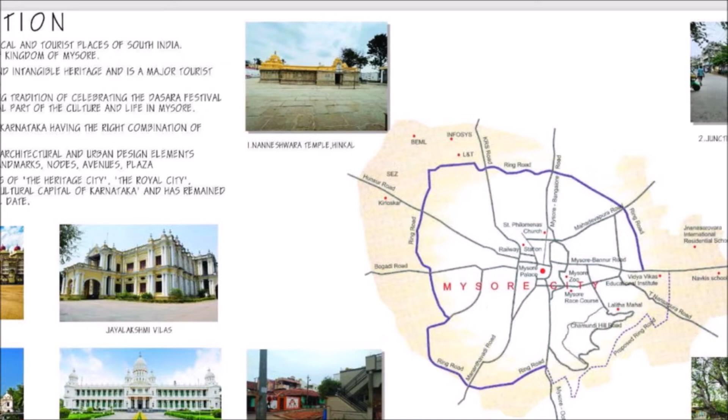Mysuru is one of the famous historical cities of South India, with it serving as the former capital of the princely state of Mysuru, having its extents from Maharashtra in the north to Madras Presidency in the south. It has both tangible and intangible heritage with stunning palaces and richly preserved architecture that is visually splendid to experience, making it a major tourist destination. The city of Mysuru has a long tradition with its practices lying in 400 years of culture passed from generations of Maharajas, celebrating the world-renowned Dasara festival with great grandeur, an integral part of the culture and life in Mysuru. It is a prime heritage city in India, having the right combination of built and natural heritage.

The city is characterized by architectural and urban design elements like vistas, focal points, landmarks, nodes, avenues, and plazas. Mysuru has earned the titles of the Heritage City, the Royal City, the City of Palaces, the Cultural Capital of Karnataka, and has remained worthy of all the titles till date. Among the 4 chosen villages, Paduvarahalli covers an area of 40.5 hectares and has a population of 14,000 people. It has primary community settlements of Nayakas and Gaudas.

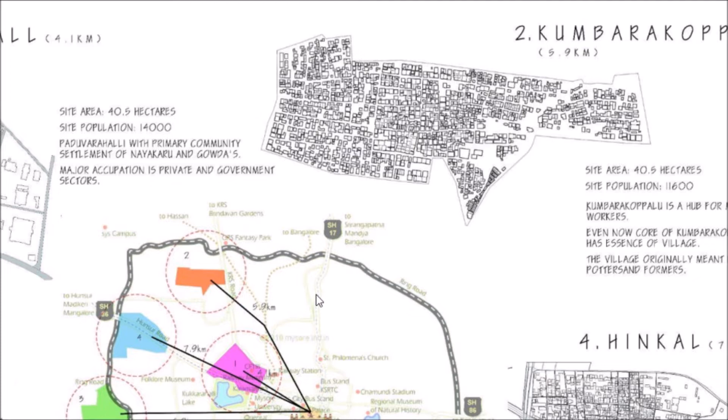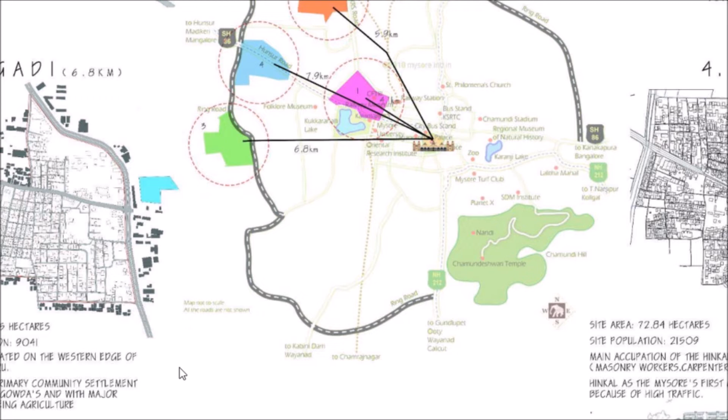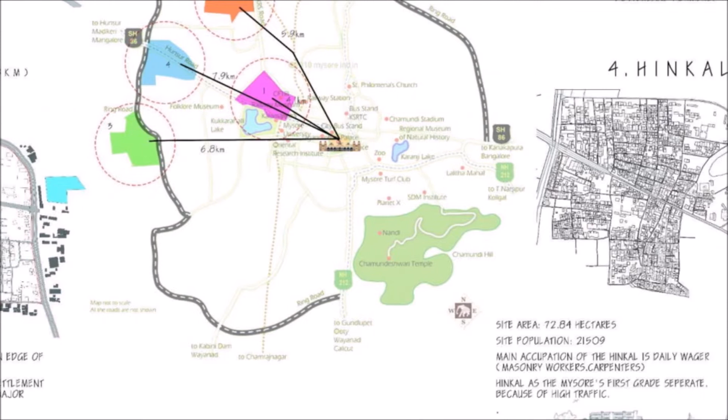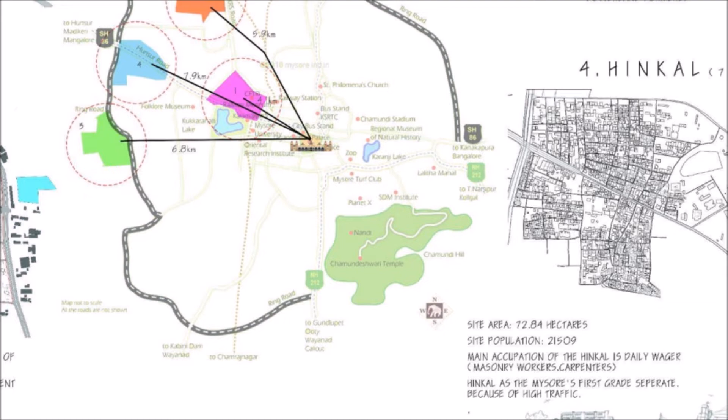Kumbarkoppal also covers an area of 40.5 hectares and houses 11,600 people. The village, which was originally meant for potters and farmers, has now turned into a hub for migrant workers. Bogadi covers an area of 44.5 hectares and holds a population count of 9,041 people. Bogadi was a primary community settlement of Vokkaliga Gaudas and their major occupation was farming. It has now become one of the fastest developing urban villages of Mysuru thanks to the ring road. Hinkal, being the largest chosen urban village, covers an area of 72.84 hectares and boasts a population of 21,509 people. The major occupations of the people living here are carpentry and masonry works.

Keeping history in mind, it was now the task of understanding these villages by conducting study area visits consisting of interviews done by inquiring stakeholders and plot owners, collecting statistics and demographics from government officials, census, and photographs taken on street level, by drones, and of activities on the streets and vernacular houses.

After this intense study, mapping of the areas took place by collection of data, information, and observation on study area. These study area visits in turn helped with the analysis done in the form of SWOT analysis, identifying issues and opportunities the study area had posed and arriving at conclusions of the study areas.

The study was further aided to understand the history and heritage by documentation of vernacular houses along with the street profiles and sections. The study area visits and studies have helped us achieve the aim of the design studio, which is to come up with a proposal with various iterations for these urbanized villages.

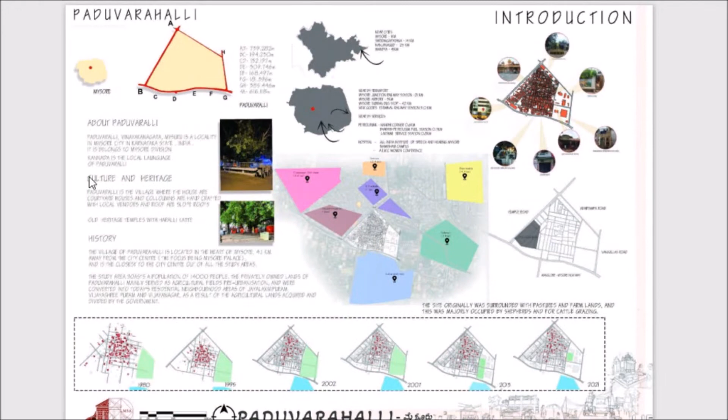Paduvarahalli. The village of Paduvarahalli is located in the heart of Mysuru, 4.1 km away from the city centre, the focus being Mysuru Palace, and is the closest to the city centre out of all the study areas. The study area boasts a population of 14,000 people.

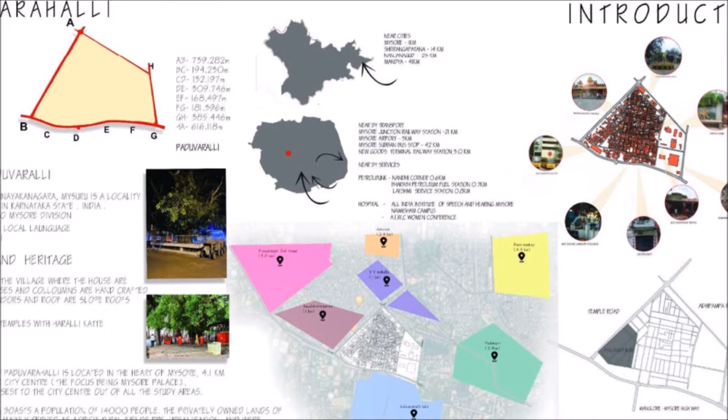The privately owned lands of Paduvarahalli mainly served as agricultural fields pre-urbanization and were converted into today's residential neighborhood areas of Jayalakshmipuram, Vijayashripuram and Vijayanagar as a result of the agricultural lands acquired and divided by the government. Prior to urbanization, the people of Paduvarahalli were farmers and shepherds with their lands located in the surrounding areas of the site, accessible by foot and bullock carts.

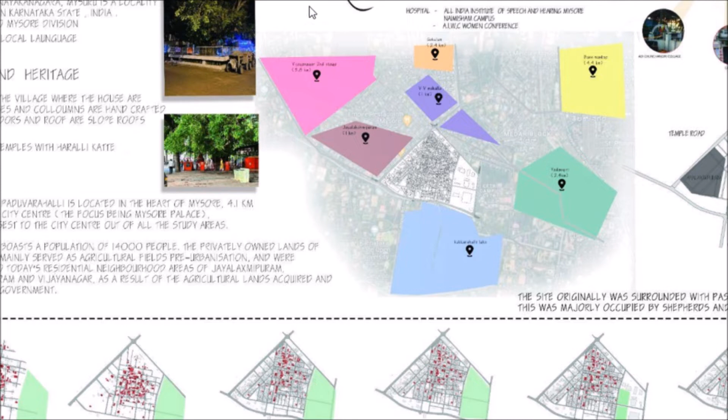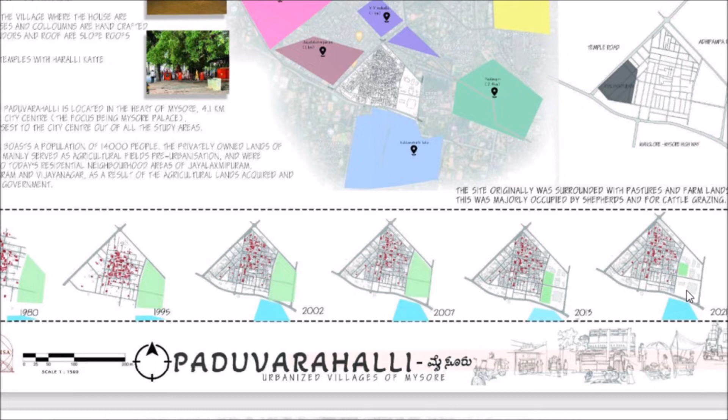Between 1930 to 1990, the CITB, the City Improvement Trust Board, now the MUDA, Mysuru Urban Development Authority, acquired the agricultural lands and divided them into housing plots. During the 1980s, the onset of the municipal corporation meant newer infrastructure and paved roads, as the study area was the closest to the city centre and on a path towards an urbanized setting. But the core village of Paduvarahalli, with its citizens, chose not to undergo this cycle of new change, thus retaining the rural aspect which stays evident to this day.

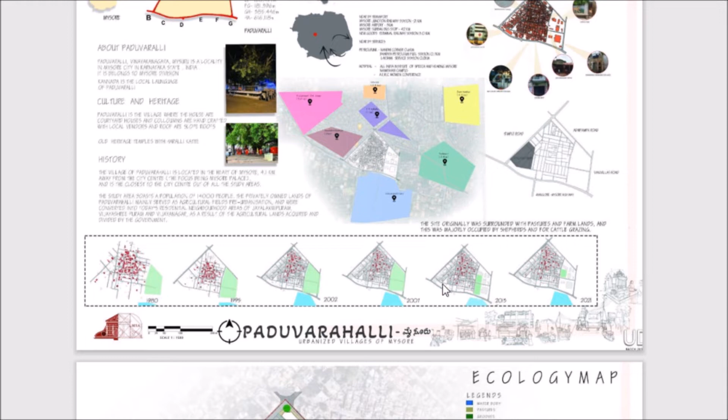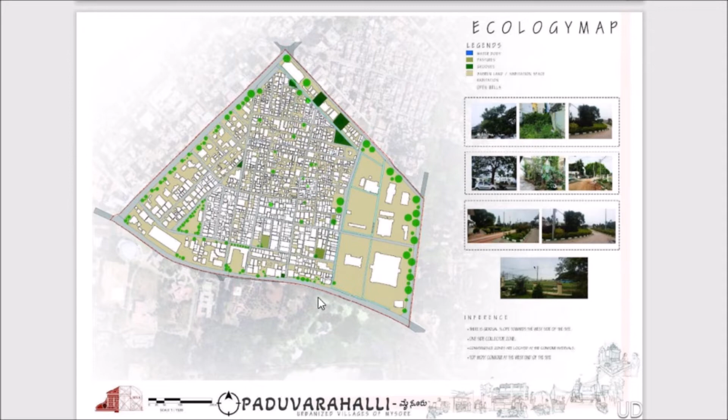The site originally was surrounded with pastures and farmlands, and this was majorly occupied by shepherds for cattle grazing. The area gradually slopes downward from west to east, where the collector basin is located. This basin acts as the major feed to the Kukkarahalli Lake, which is in the immediate vicinity of the study area. Also, this watershed basin is used as the main stormwater let-off, thus keeping the site from flooding. Some of the existing barren lands are either used for cow grazing or as dumping yards.

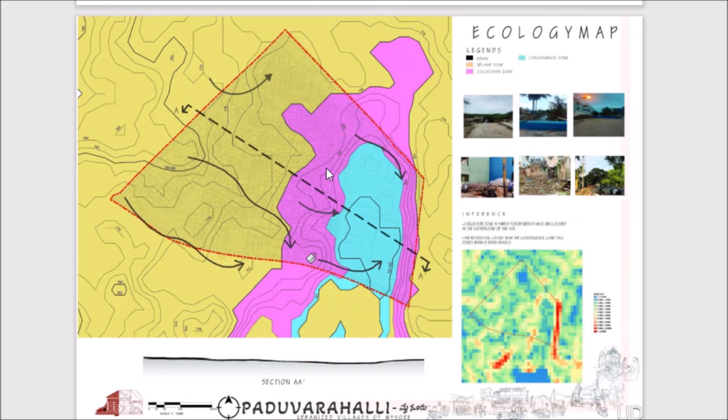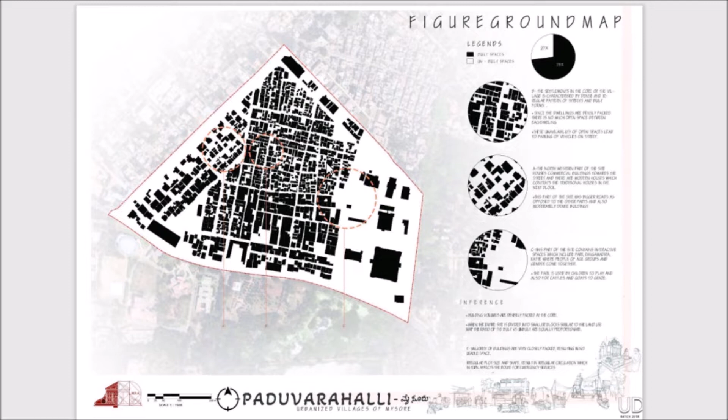The expansion of Paduvarahalli started with the now existing village area and organically spread towards other parts of the modern-day area. Thus, the ownership plots are not organized into that of an urban division, and this is evident in the rural area. Also, due to such dense fabric, the area is permeable and offers easy access to the outlying areas for pedestrian use, but this hinders vehicular and emergency service movement. The dense grain of built spaces gives the study area a distinct fabric from the adjacent neighborhood areas.

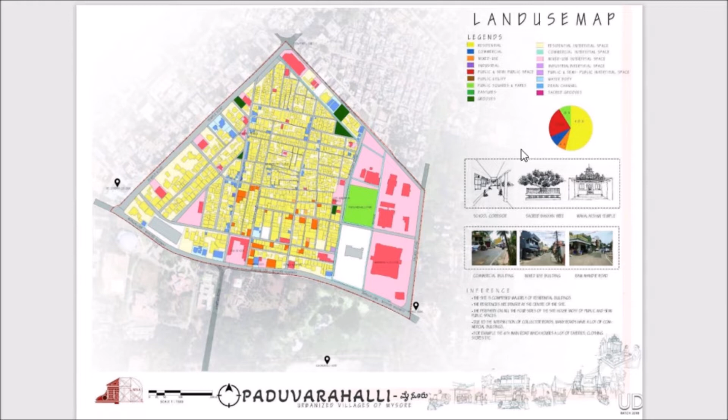Most of the buildings are residential in nature, with other typologies such as commercial and public located near the major roads such as the Mangalore-Mysuru highway, which also is the spine of the study area and the access point to Paduvarahalli. The buildings on site are majorly one-storied, thus have a linear hierarchy in the skyline. Irregular breaks occur due to few multi-storied buildings. This hampers visibility of the user as it is sometimes too monotonous.

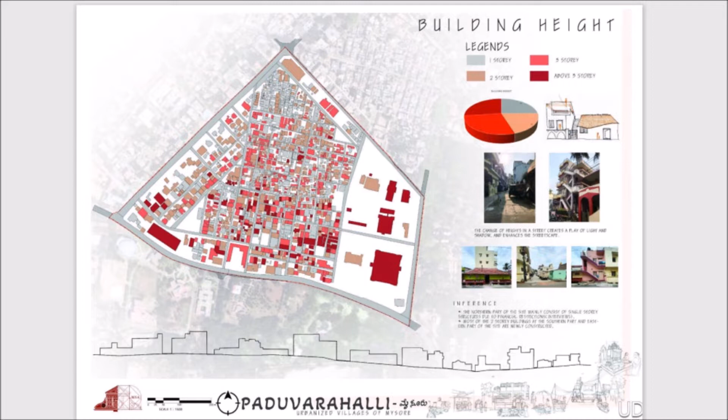The buildings in the core and underdeveloped area have retained sloping roofs. The core is also where most of the vernacular houses are located, with few of them being 100 plus years old and still in good condition. This gives the site a character that sets it apart from the surrounding buildings that are mostly made of masonry and are quite recent.

Due to recent developments such as road widening, the frontage of many streets and individual houses has disappeared. Houses that contain cattle are now tying them directly exposed to the street. Hawkers and vehicles are illegally parked, thus hindering vehicle movement. Also, construction sites dump their equipment and resources right out in the street, which threaten residents and pedestrians.

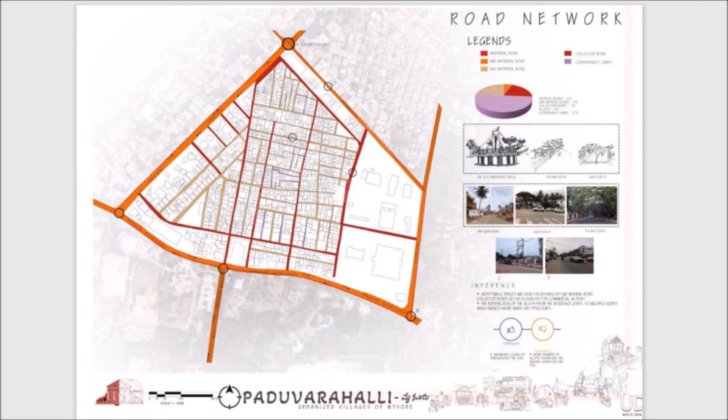The core and adjacent residential areas are easily accessible by arterial and subarterial roads. The intersections of collector roads inside the core are nodes and also house commercial buildings. The majority of the commercial buildings lie along the arterial roads, mark different districts and act as district edges. Few of the major arterial roads such as Adipampa Road and Valmiki Road are also used as procession pathways during festivals.

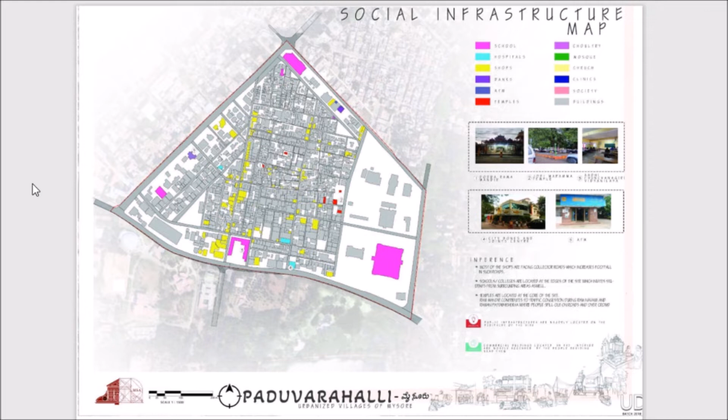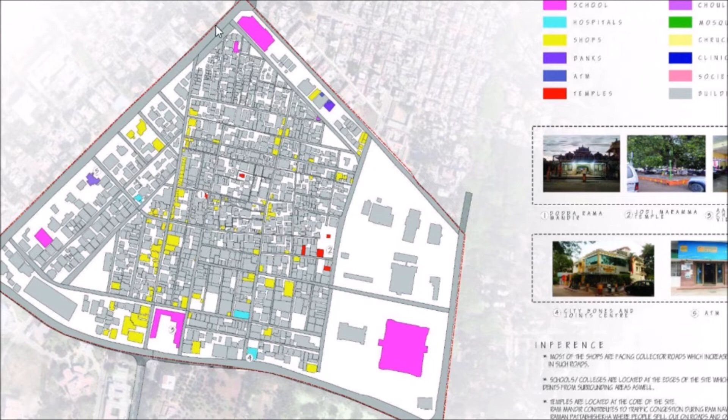Paduvarahalli also hosts many societal festivals such as Ugadi, Sankranti, Deepavali, and also few festivals that are celebrated by certain communities such as Ambedkar Jayanti, Valmiki Jayanti, and Mari Habba. This also goes to show the diverse communities that occupy the study area such as Gaudas, Nayakas, scheduled castes, and other classes. The study area caters to the basic needs of the society such as shops, schools, institutions, hospitals, which have seen recent developments and help the general public by being located in close proximity and easily accessible.

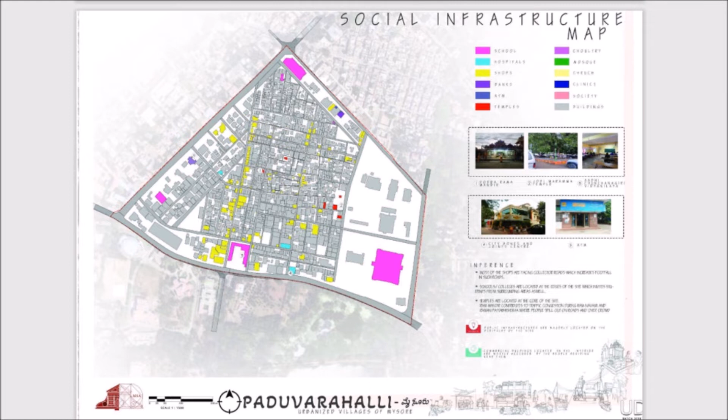Also, the citizens brought a few issues to light, such as waterlogging during heavy rains due to the basin not being open to the stormwater let-off, the poor condition of the buildings, poor public infrastructure in water and electricity supply, and untimely delays in government sanctions. It was also noted that the community was dismayed due to no open space or common gathering space to celebrate certain festivals, as temples and roads surrounding the space would get crowded during festivities.

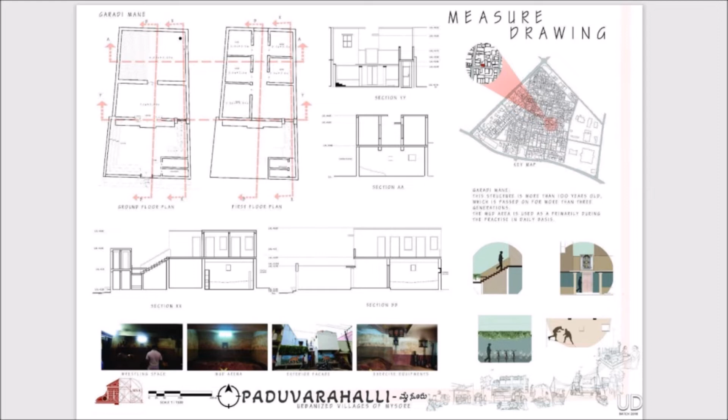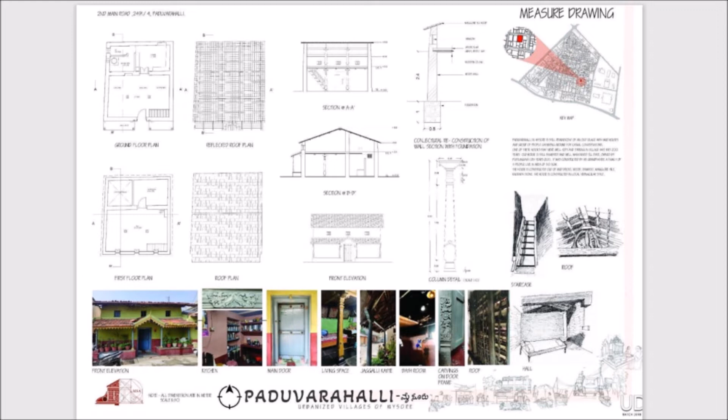A few of the well-preserved vernacular houses were documented. They contain courtyards, detailed wooden pillars, and elements that are signature characteristics of the study area. A number of these houses were once gifted by the royal family to prominent people and craftsmen, and were made in the style of the ongoing architectural trend of that era. These houses are the current relics of the past, which act as historical markers in an area that has seen the urbanization of Paduvarahalli. The site also shows the treatment and the standings of the society.

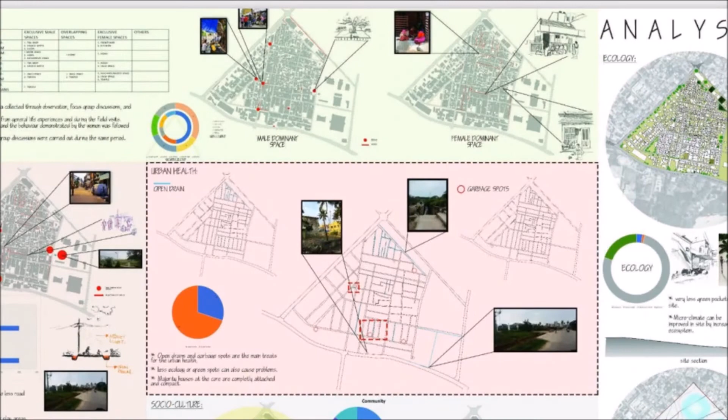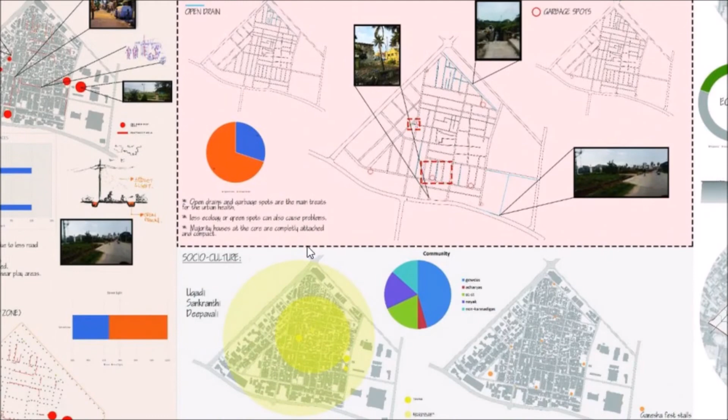Spaces such as chai tapris, industrial shops, and most commercial and work spaces are male-dominated, while spaces such as community taps and house frontages are female-dominated. The major child-friendly spaces apart from the schools are the open grounds and streets, which are active during the night due to good illumination. There are a lot of open drains near the children's play area, which affect the quality of activity and threaten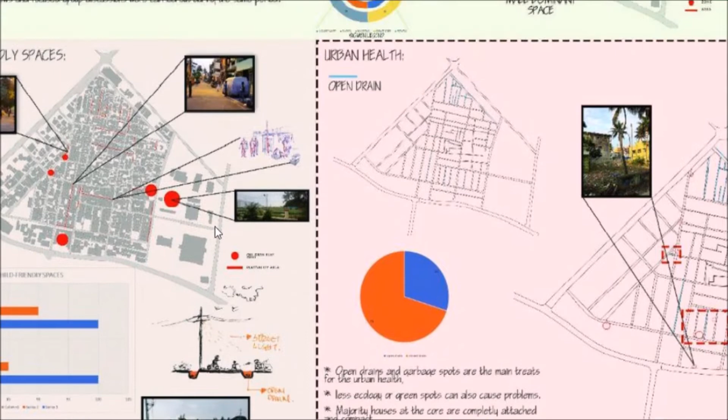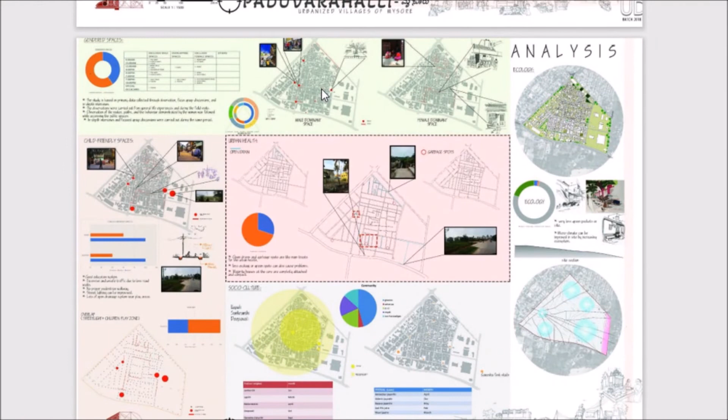the safety of children. Speaking about the urban health of the area, open drains and random dumping yards are causing issues, as these spaces are inaccessible and devoid of activity. The lack of green pockets in the study area is also quite problematic. Due to time constraints, only Paduvarahalli has been explained in detail and the remaining study areas are going to be shown briefly.

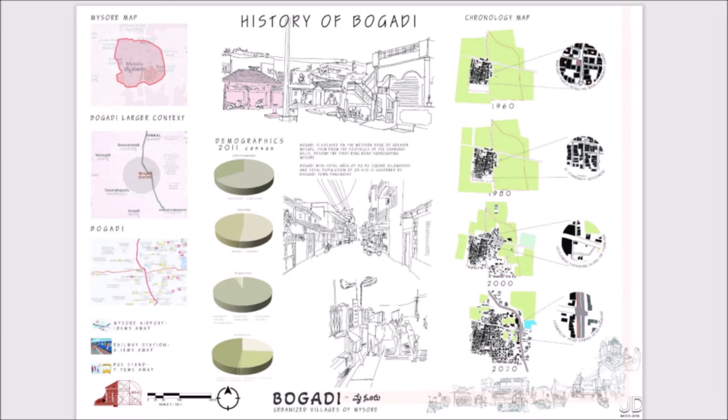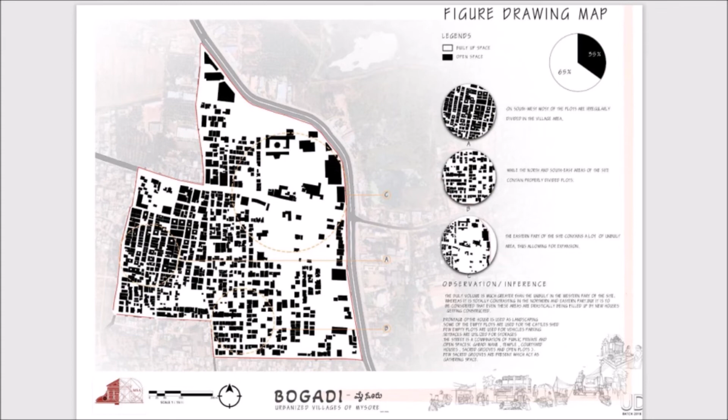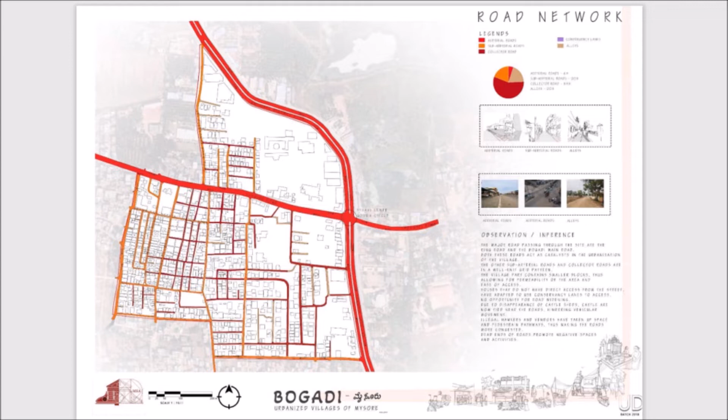Bogadi. Bogadi is located on the western edge of Greater Mysuru, 7 km from the Mysuru Palace and beyond the Mysuru Ring Road. It has a total population of 9,041 and is governed by the Bogadi Town Panchayat. This was the latest village to be merged into Mysuru among our 4 study areas, but is the fastest developing one. The core of the study area is fine-grained and organically developed, whereas the newly developing northern and eastern parts have quite a few vacant lots, which are filling up drastically. Also, the only retained vernacular buildings are concentrated in the center of the site.

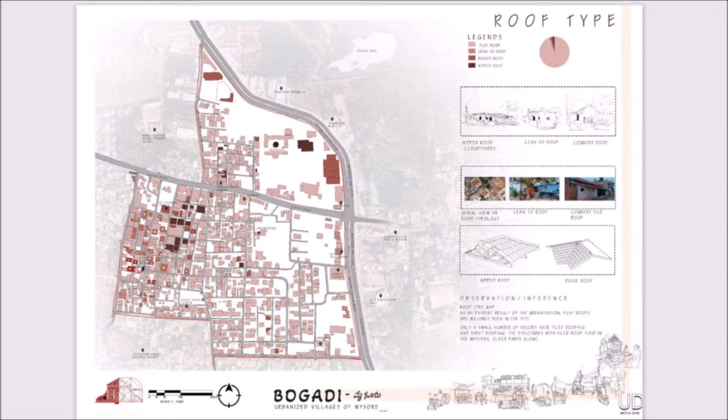The major contributor to this development is the Mysuru Ring Road, constructed in 2005. The sidewalks of these roads have naturally turned into activity hubs. The major lung space of the study area is the coconut and banana plantation, which is preserved as private property. The stormwater naturally drains off to the Bogadi Lake in accordance with the natural slope.

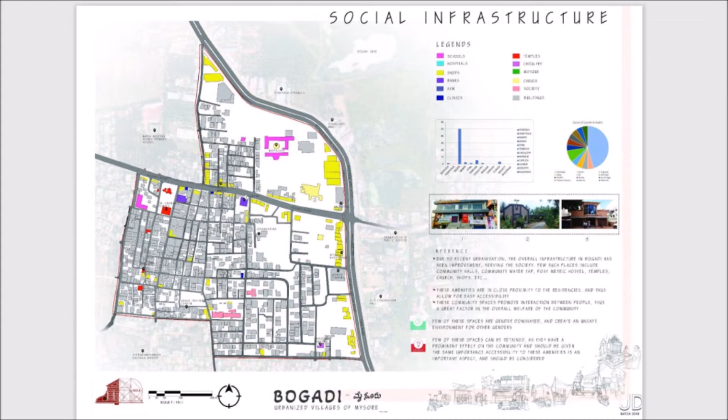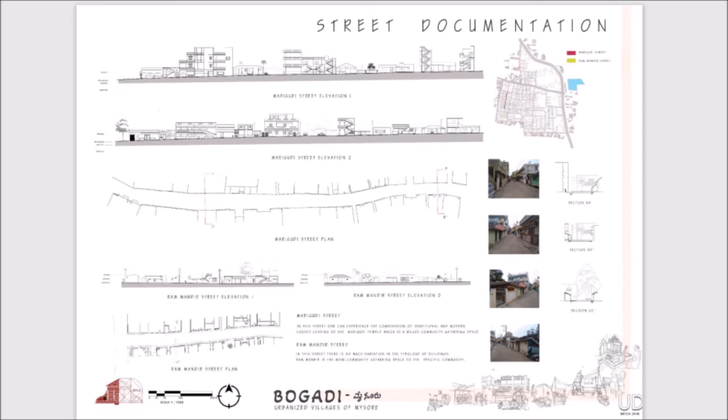3 vernacular houses were taken up as case studies, out of which 2 houses were completely retained, whereas the third one is only half the original structure. We can see that all these houses are courtyard houses and have a sufficiently big storeroom and a cowshed. The Marigudi temple holds great socio-cultural importance as it is said to have been the beginning of Bogadi and belongs to the Vokkaliga Gowda community. People gather here for Mari Habba every year.

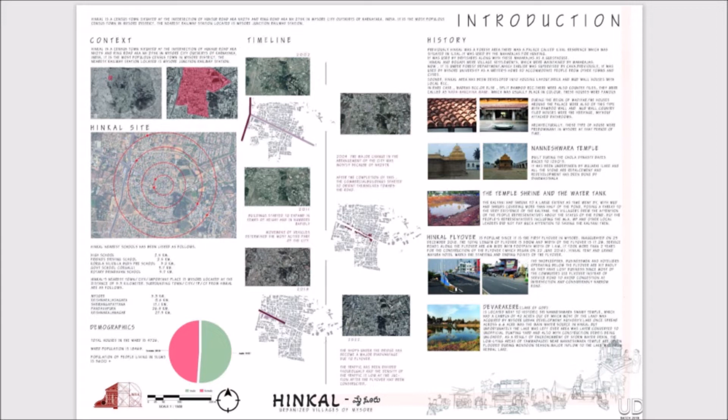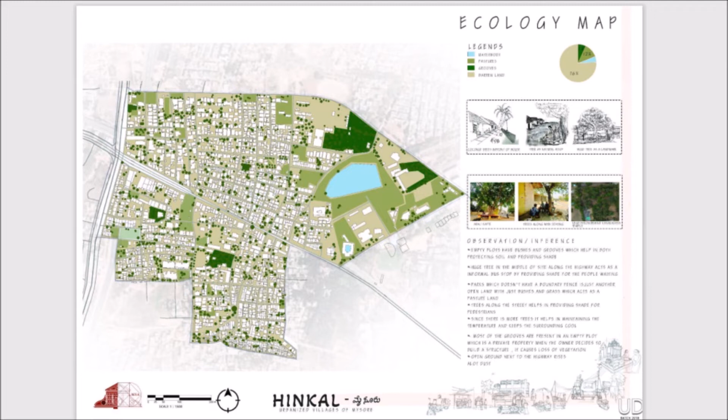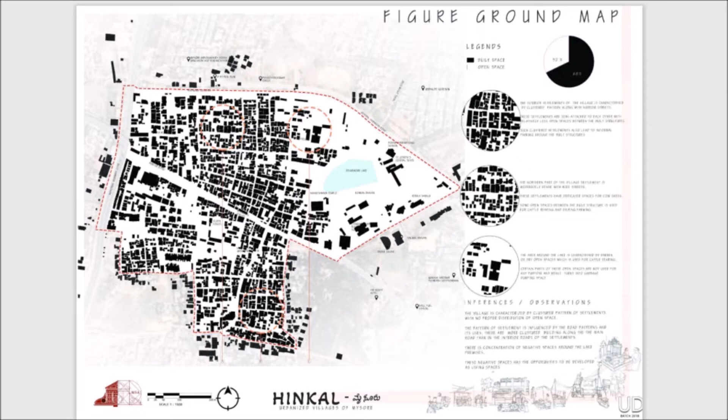Hinkal. Hinkal is a census town situated at the intersection of Hunsur Road NH 275 and Ring Road NH 275K in the outskirts of Mysuru, Karnataka, India. Hinkal was a village settlement which was maintained by the Maharajas. Presently, it has been developed into a housing layout. The major change in the arrangement of the village was mostly because of the ring road. The Nanneshwara temple is situated in the village and was built during the Chola dynasty, dating back 1250 years.

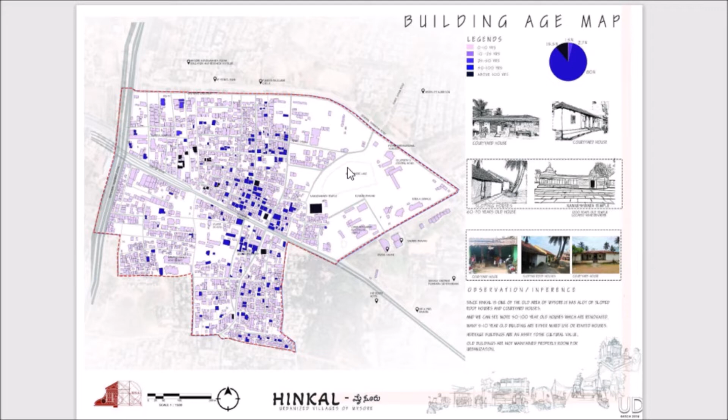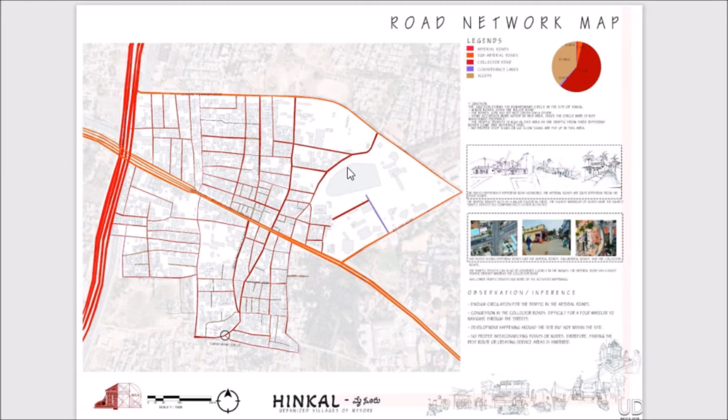The Devara Kere lake, located next to the historic Nanneshwara Swami temple, once spread across 6.6 acres and was once the main water source in Hinkal. The natural slope is towards the lake, creating a catchment area, making it easy to direct the stormwater towards it. The village is characterized by a clustered pattern of settlements with no proper distribution of open spaces. There is a concentration of negative spaces around the lake premises which haven't been maintained.

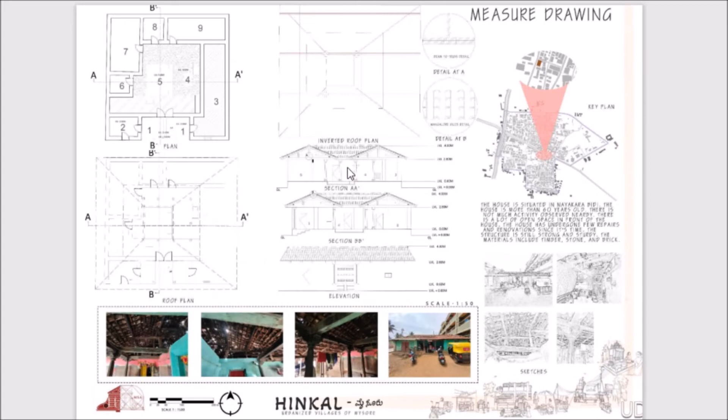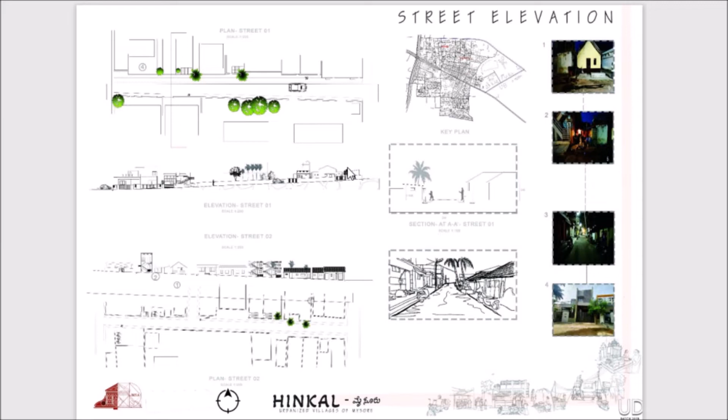The school and clinic act as the government condensers and the temples act as the major social condenser. Though the village is subjected to urbanization, it is still functioning based on the village communities and the merged government. Another notable change due to the implementation of the flyover is the growth of the commercial sector adjacent to the NH 275.

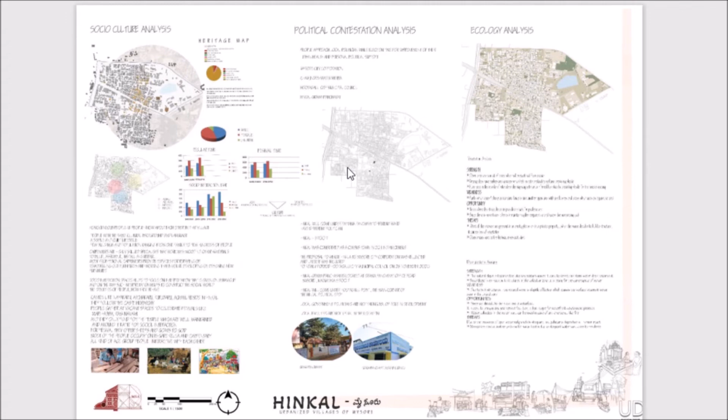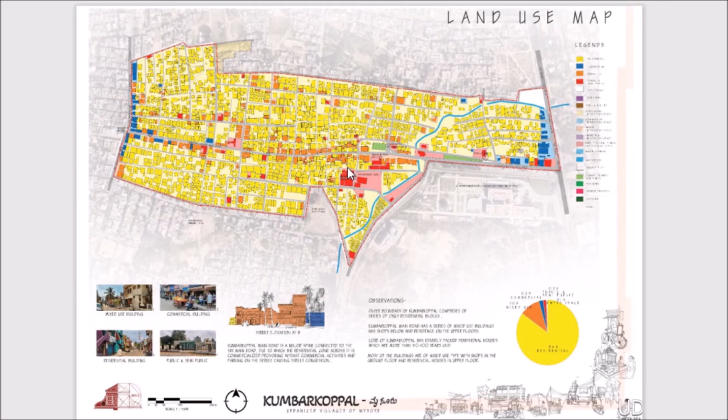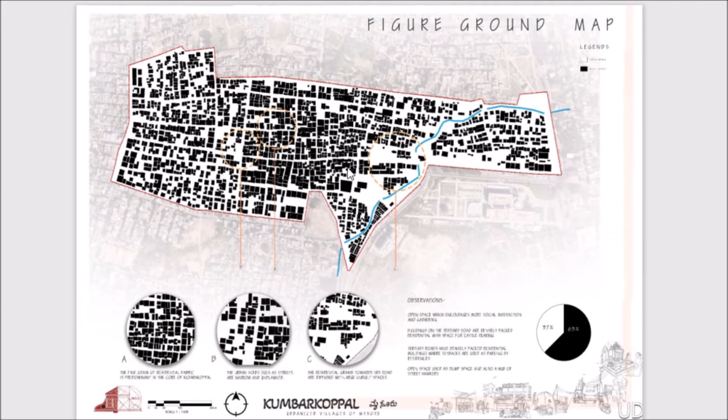Kumbarkoppal. People who migrated from nearby villages like Hebbal, Metgalli, Belavadi, Maranagaudanahulli, Kavanahalli, Basaralu, and Lingadevara Koppal formed the initial population of the village. Around 500 people and 150 houses, of which the majority were Vokkaliga Gaudas, constituted the village back in the day. The families residing in the face of the settlement were potters, who are locally known as the Kumbaras, hence the name Kumbarkoppal. The present population of Kumbarkoppal is 11,630.

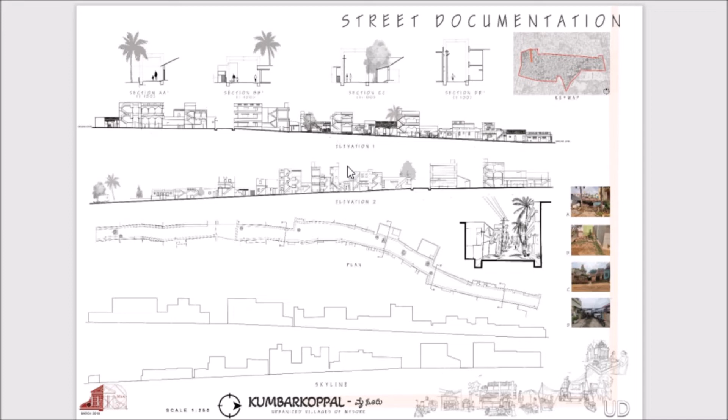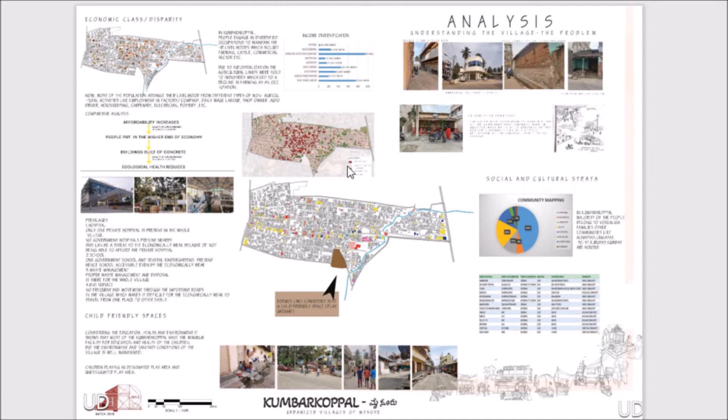The core is fine-grained and has houses that are up to 150 years old, whereas the rest of the study area is quite coarse-grained and has newer houses. Unlike the other three villages, residents in this village were seen maintaining small gardens in the open spaces. Both the main roads and the connector roads are too narrow to handle the daily traffic, especially during the peak commute time. The presence of a blooming industrial area like Hebbal has led Kumbarkoppal to be the housing hub for the migrant employees of the industries.

After the village studies, the study areas were identified having few issues which were seen in common across the villages. These issues posed as a challenge that has to be overcome by the design proposals. The issues were identified on micro level, that is at settlement scale, then at neighborhood scale, and finally in a city scale. The government has provided the villages with basic services such as water taps to each house, electricity, stormwater drainage, and UGD that have helped the overall health of the community life.

As the demand for RCC and modern structure has increased, mud houses are being demolished, which is having adverse effect on the ecological health of the area. The stormwater drains in the study area are inefficient as the water flows into the streets when they fill up during monsoon. The children have no designated playgrounds or parks and play out in the open street, which is not safe due to vehicular movement and other street activity. Roads have encroached frontages and house offsets due to road widening.

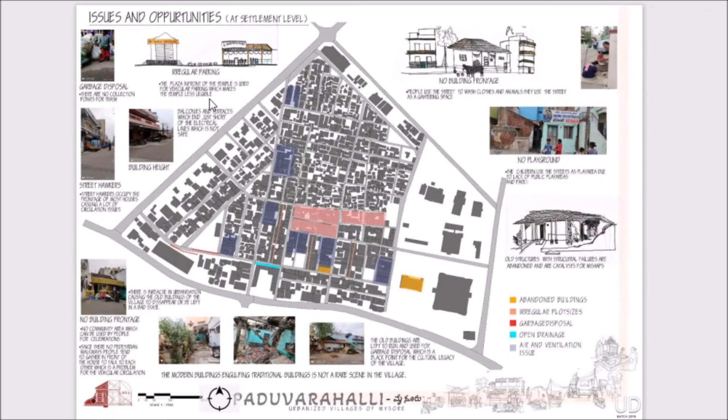The empty plots and unused barren lands have been converted into dump yards and have now become the grazing fields for cattle. In Paduvarahalli, the temple plaza, which should be a space of activity, is used for informal parking, thus making the space less legible. The plots of Paduvarahalli have less value due to its rural setting and has caused a low standard of living. Due to urbanization, the agricultural lands were flattened, losing its natural terrain.

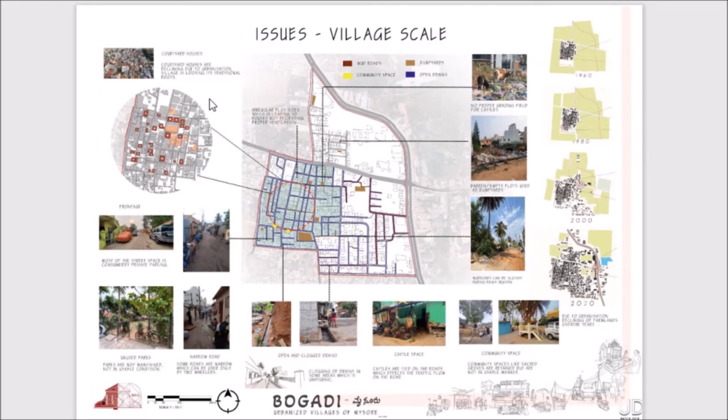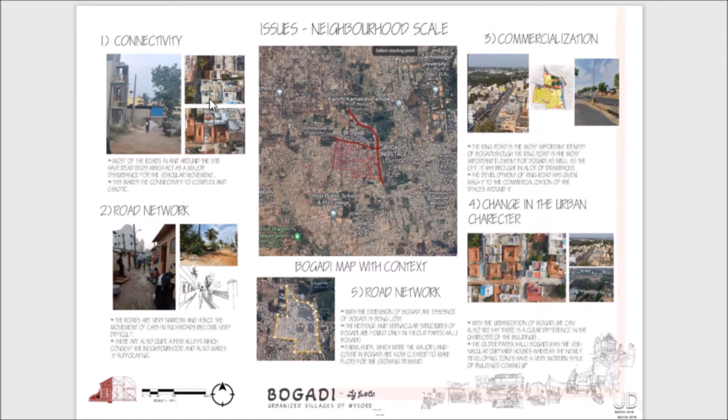In Bogadi, few of the collector roads in the village area are still underdeveloped and are in dreadful condition, making for unpleasant movement both for vehicles and pedestrians and a major liability during monsoon season. Due to organic plot boundaries of houses in the core, these houses have no proper offsets and make it harder to access the ones located further inside. Thus, these houses use conservancy lanes as accessways. Most roads on the site and off-site leading to the neighborhoods end abruptly, thus making it confusing to access other areas.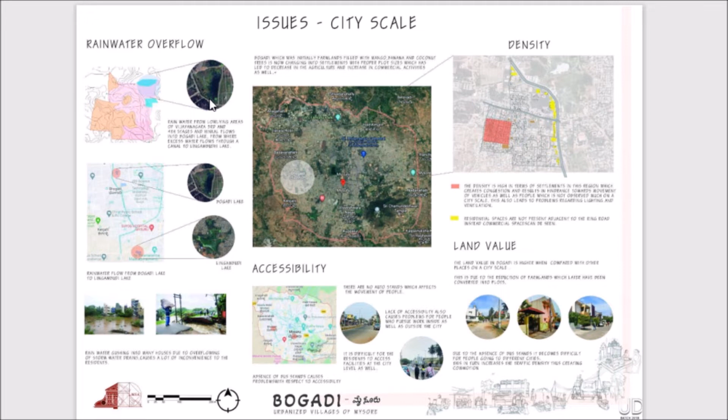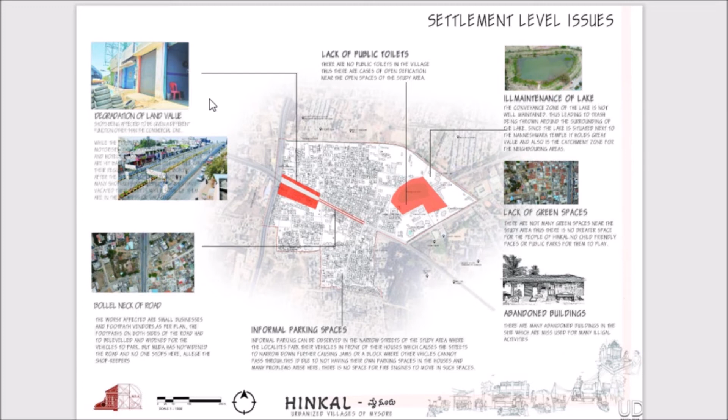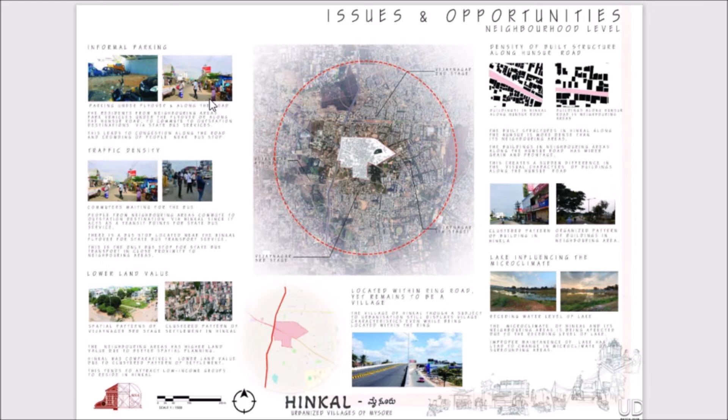In Hinkal, the flyover calls for a negative space that is away from the safe eyes of the public, thus encouraging illegal activities such as littering, illegal parking, and accidents, which are very common. Also, the government response to the study area is neglected as there are no government hospitals in the immediate vicinity and an ancient temple that has been overlooked and gone undocumented.

In Kumbarkoppal, there is no designated area for loading and unloading of goods, which has led owners to dock them along the road, which hinders vehicle movement. The presence of an industrial area adjacent to Kumbarkoppal has made it become a hub for migrants and daily wage workers who have settled along the main Nala on site and has led to the creation of a slum that is in poor condition.

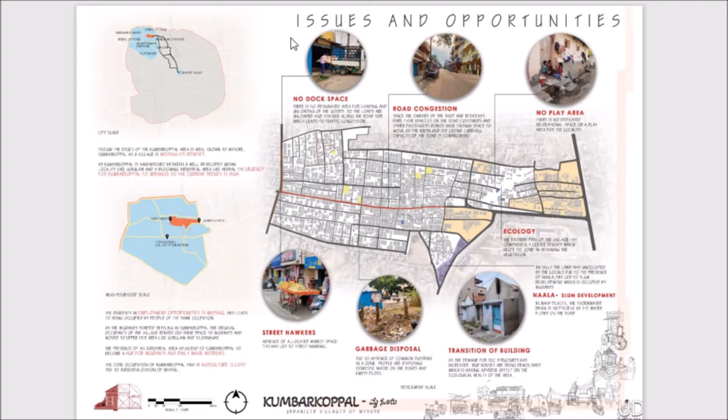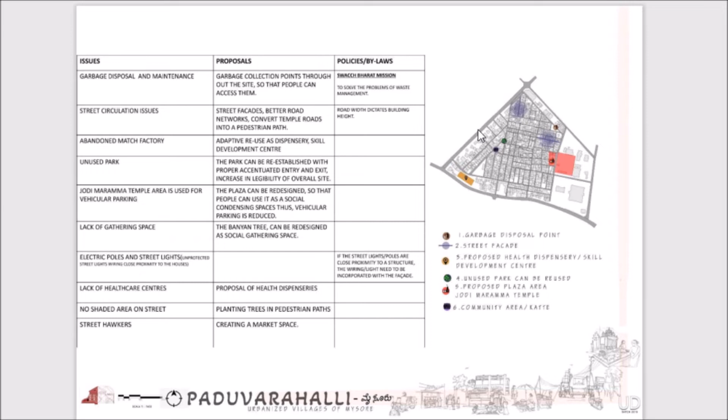With the vision of retaining the essence of the village, a few policies are recommended to be implemented to improve the residents' and the wayfarers' convenience and the environment. A road development policy, a policy for urban street vendors, an urban land policy, a public and community toilets policy, a waste disposal policy, a rainwater harvesting policy, a redevelopment of water body policy, an industrial and infrastructural development policy,

an education policy, an urban transportation policy, a non-motorized transport policy, a government hospital policy, an old house regeneration policy, an urban mobility policy, a culture and heritage development policy, a heritage and tourism policy, watershed area redevelopment policy, and the operation and maintenance of sanitary installations policy.

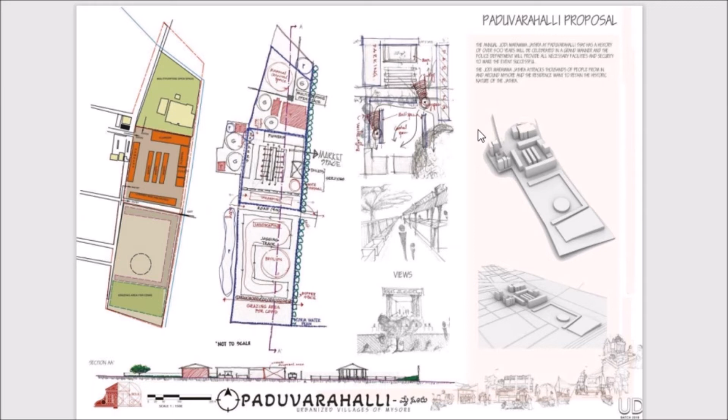Paduvarahalli. The annual Jodi Maramma Jatre at Paduvarahalli that has a history of over 500 years is celebrated in a grand manner, and the police department provides all necessary facilities and security to make the event successful. The Jodi Maramma Jatre attracts thousands of people from in and around Mysore, and the residents want to retain the historic nature of the Jatre.

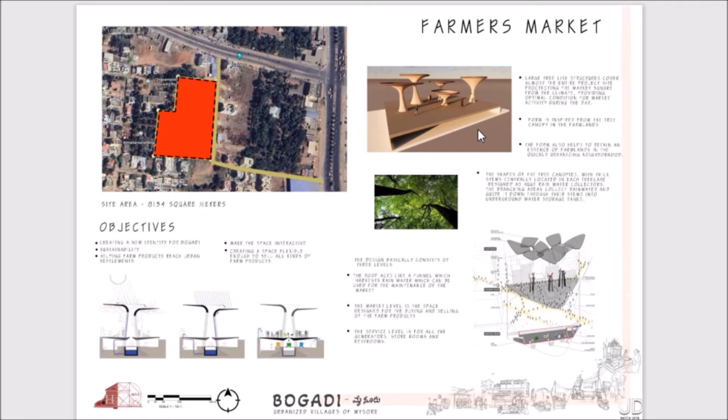Bogadi, a farmer's market. The objective of this proposal is to help all kinds of farm products reach the people directly in a social and interactive space. This will also serve as an identity for Bogadi. Large tree-like structures covering the entire site act as structures protecting from harsh environment. Also, due to their shape imitating trees, rainwater is collected in the water storage and filtering tanks.

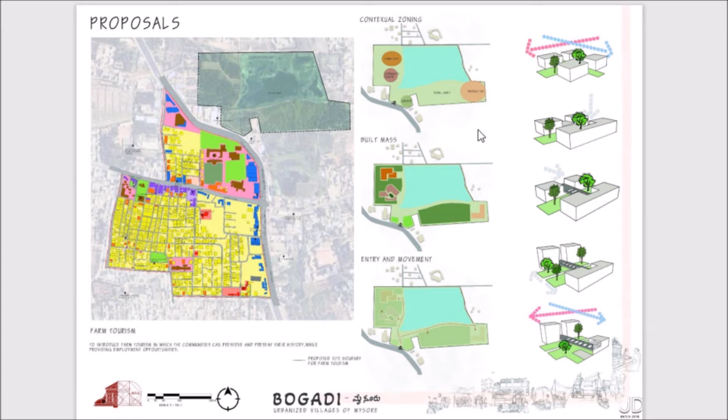Farm Tourism Center. The aim is to revive tourism and improve the study area's economic status without exploiting the residents' cultural identity. It is to make certain that the communities can preserve and present their history and culture to their own community and strengthen their sense of belonging.

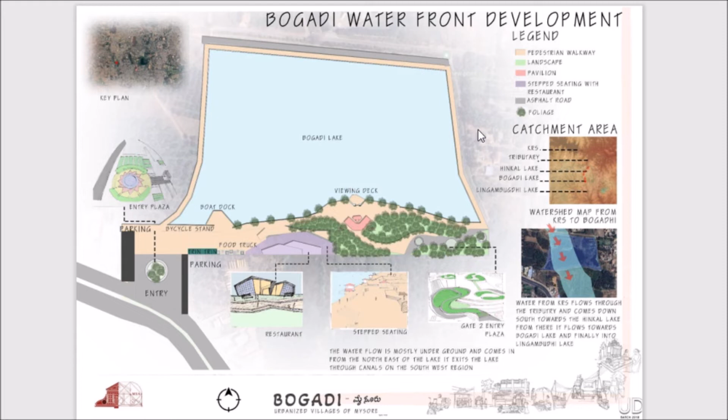The waterfront development. This can easily become an identity to the lake that it presently lacks. The restaurant and the two entrance plazas serve as the major recreational spaces and attractions. A wide range of services and activities under agritourism offered here includes guided tours, participation in agricultural activities, knowledge sessions, animal rides, and other activities which help promote farm tourism.

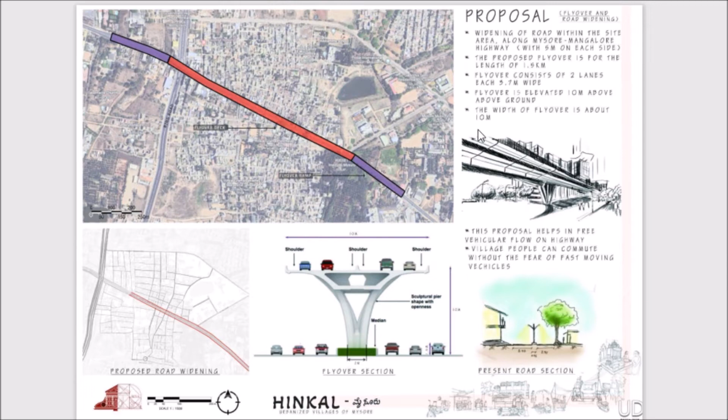Hinkal, flyover and road widening. Widening of road within the study area along Mysuru-Mangalore highway. The proposed 1.5 km long flyover consists of 2 lanes, each 3.7 meter wide. It is elevated 10 meter above ground and the width of the flyover is about 10 meter. This proposal helps in free vehicular flow on the highway so that the localites can commute without the fear of fast moving vehicles.

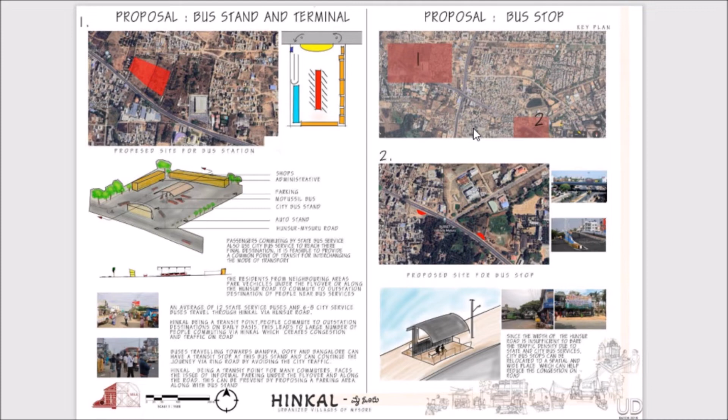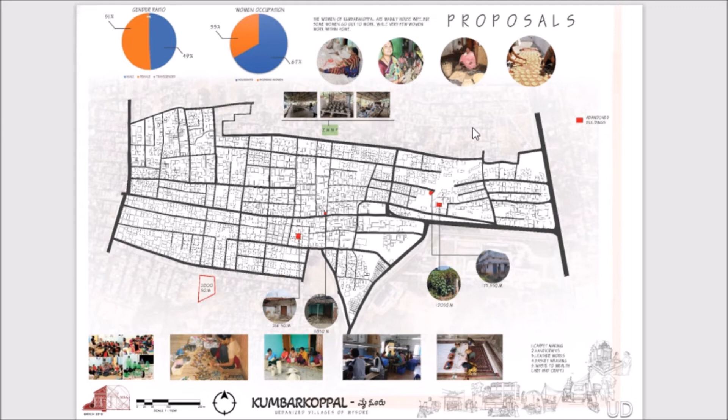Kumbarkoppal. Adaptive reuse of the existing choultry. The women of Kumbarkoppal are mainly housewives, but some women go out to work while very few women work from home. As adaptive reuse can help in lowering construction costs, especially compared to traditional building projects, the choultry opposite to the temple can be utilized for displaying or selling products from cottage industry when the choultry is not in use.

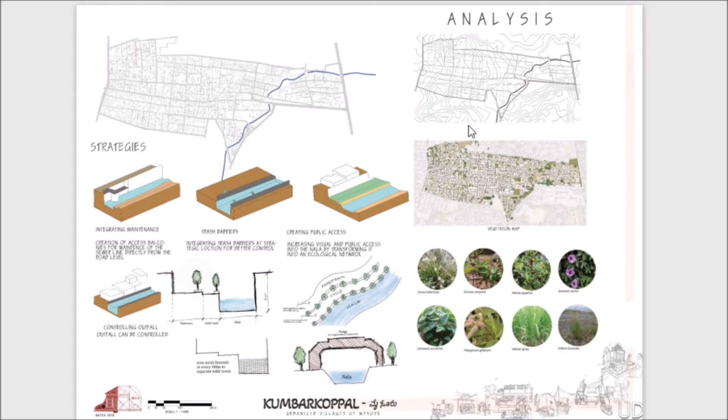The Nala Development Proposal. The Nala that is completely neglected can be redesigned by increasing visual and public access to the Nala by transforming it into an ecological network. Maintenance can be integrated by creation of access balconies for maintenance of the sewer line directly from the road level. Trash barriers can also be integrated at strategic locations for better control.

So, to wind up, these villages are the relics preserved over time. It continues to play its role as the bridge between traditional and the modern city of Mysuru. Also, these villages create employment in a sense that it houses construction workers, maids, part-time workers who are the main source of workforce that have helped urbanize the city.